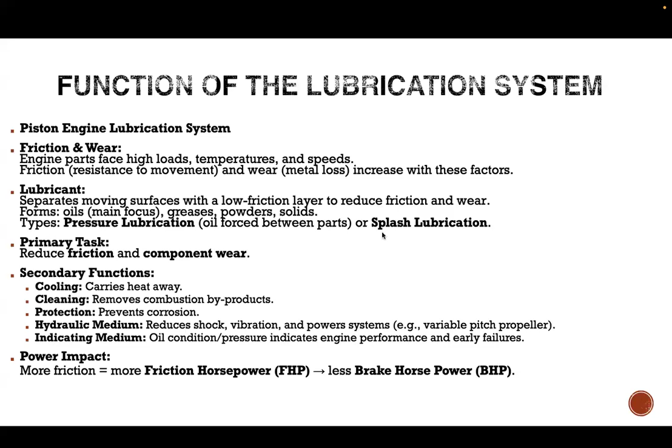So these are your primary functions of your lubricating system. Next we'll talk about your wet sump and dry sump system. Wet sump is basically your splash lubricating system, and dry sump is basically a pressure lubricating system. These are the only two systems available, and depending upon our exact requirement, we can either choose a wet sump system or a dry sump system.

The basic difference between your wet sump and dry sump system is where and how your oil is placed and how it is transferred to your engine. First we'll talk about your wet sump system. Like our Cessnas, we use a wet sump system where you store the engine oil right under the engine. You have an engine sump which holds all the engine oil, and by the movement of your crankshaft, it throws the oil around, which helps in lubricating.

But the problem with this type of lubricating method is that we tend to over-lubricate our engines - we cool it down and lubricate it way higher than what is actually required. This causes a problem: whenever we are maneuvering the aircraft, let's say banking to one side, the whole oil is going to go towards one piston. So one piston might get over-lubricated while the other piston might not get lubrication at all. These are the problems with having a wet sump system.

The other issue is about temperature. We cannot control the engine oil's temperature since it is stored right under the engine, and your engine is constantly running. So your engine oil temperature tends to be on a very high scale, causing the whole engine's temperature to always be very high, and it might get even higher if your engine is overworked.

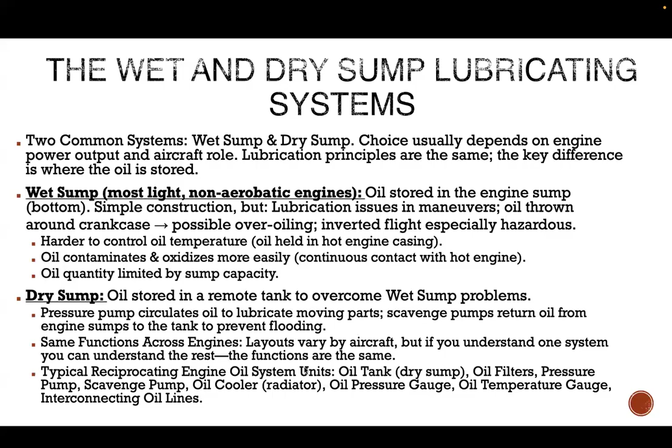First, you have it in your oil tank, which is also called a hot pot. You have a suitable scale to measure how much oil you have inside the tank. Then you'll have an oil temperature gauge inlet, which is going to measure the temperature right after the oil tank itself.

Then it goes to the suction filter, where it is filtered for any particles or debris, some dirt, whatever, which should not enter into our engines. Then you have your pressure pump. This pressure pump is a helical gear which spins against each other, which pressurizes your oil, and then it goes to a pressure filter.

This pressure filter is even more fine than your suction filter. So in your pressure filter, whatever further debris you have is taken away, so you don't have any debris at all. And at the end of your pressure pump, you're going to have an oil pressure gauge which measures the amount of pressure that goes into your engine.

And then it is sprayed into the engine core components. Once the job of lubricating is done, the engine will start dripping off the oil. It will go to the scavenging filter, because at this filter you're going to have carbon deposits. If your engine has more wear, there will be small metal pieces and all those things which can be collected, and then you can verify if everything is working properly or not.

Then that oil goes to a scavenging pump. Again, your scavenging pump is also the same helical gear, but it is going to be slightly bigger than whatever gear the pressure pump has. Your scavenge pump's gear is slightly bigger because we have to overcome gravity in pushing hot oil up into the tanks again.

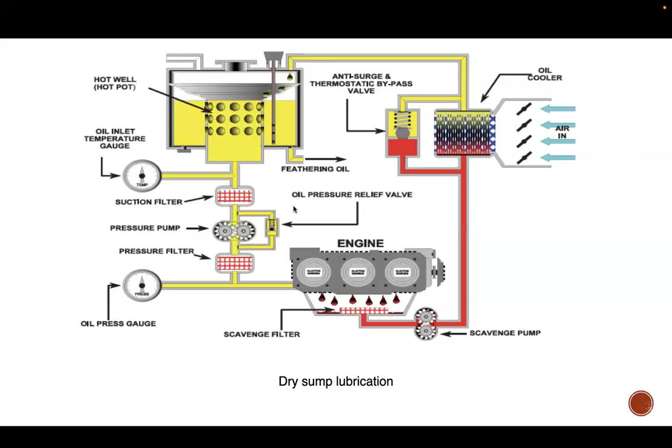This all works only whenever your oil is very cold and thick. If it's very thin, not as thick, or very hot, everything works normally, and it goes to the radiator where the air cools it. So this is the working of your dry sump system.

So we talked about the oil tank. It's made up of sheet metal, and you have internal baffles. These baffles break down the oil tank into many different sections, which limits the amount of force exerted on the walls inside the tank.

If you had one single large tank and your aircraft was maneuvering left and right, all the oil would hit one side or the other, causing problems due to the movement of the oil cushion. So when you baffle your tanks, it reduces the oil forces hitting the walls at each end. These baffles are also strengthened to overcome these forces.

Then your reservoirs are placed wherever possible above the engine. Why above the engine? In that case we can use the help of gravity along with the pressure pump to help feed the engine with high pressure, so the pump shouldn't have to do all the work of lubricating your engine.

The oil return starts whenever you start your engines, going to the oil drains. After shutdown, the scavenge pump will return oil that's at the oil sump itself, because your engine will still be dripping down oil.

Once you start your engine again, your scavenging pump is going to do the job, pushing all the oil back into the tank. So if you shut down your engine right after a flight, the oil that was lubricating your engine will still be dripping down into your scavenging tank and remain in the line, because it has to overcome gravity to be sent back up. This will only happen whenever you start your engine again.

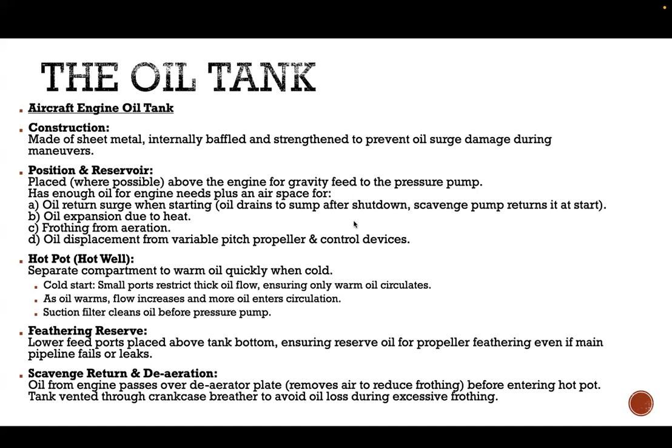So this is how your suction filter is going to work. Your suction filter is made up of different components, including the filter element. It's basically a very coarse wire mesh that is twined together in a rectangle or square box shape, which allows your oil to pass through it.

You're going to have a suction filter before the pump, where your oil passes through this suction filter and then goes into the pump. This removes any large solid particles in your oil, like carbon deposits, dirt, or metal pieces, and then your oil enters into the pressure pump.

Why do we do it? If large particles enter into your helical gear, there's a chance they can damage the helical gears, and your pump will lose its efficiency in supplying oil into your system. So to prevent this, you have a suction filter.

Whenever you change your engine oil during maintenance, whether it's at 100 hours or annually, they'll always replace this oil filter. If your oil filter is blocked or clogged because you didn't change it for a prolonged time, your oil pressure gauge will indicate very low oil pressure, meaning oil isn't going into your system properly. So you have to replace your suction filter.

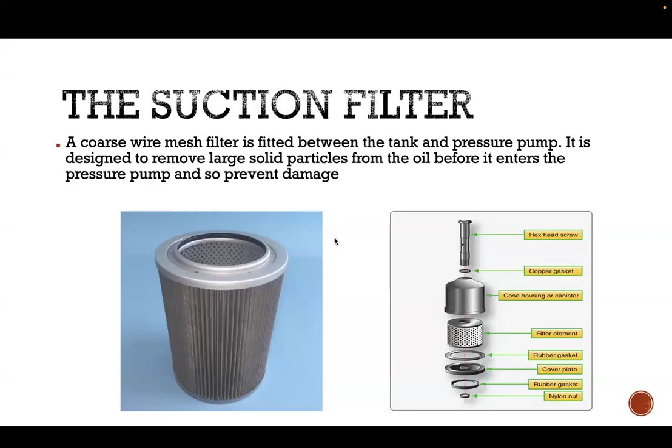Now, this is about your pressure pump. Your pressure pump is basically combined of two spur gears, which rotate in two different directions. This is basic engineering — when one gear rotates anti-clockwise, the other gear will definitely rotate clockwise.

If you want another gear to rotate anti-clockwise, you have to attach a third gear, then only it will start rotating anti-clockwise. For our case, we only want our oil to be sped up and sent through the system.

What your spur gear does is take oil from the inlet. Since the speed at which it spins uses centrifugal force to push it through the wall of the pump casing, this increases the pressure, and once the pressure increases, it goes through your oil outlet. So this is how your spur gear works.

Second, if your pressure is high, to relieve it we use a non-return valve, also called a pressure relief valve. In this case, your oil pressure can only go through one way and not through the opposite side. Your oil will go up through this way and not come back down.

How it works is, if your pressure increases, the ball is pushed up because of the excess pressure. When the ball is pushed up, the oil will again go into your inlet, and this whole cycle keeps continuing. Since the pressure is high coming from the outlet, it doesn't want it, so it goes up and then comes back down.

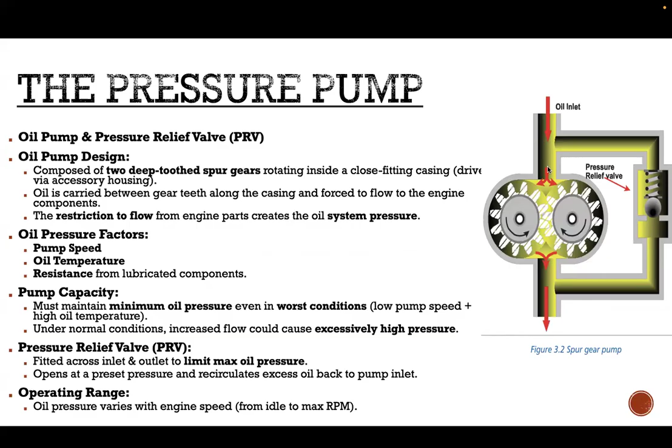The second type can also be an electrically operated shut-off valve. Depending upon how complex your aircraft is, you can either use a manual method like a lightly spring-loaded valve, or if it's a very big aircraft, you can use an electrically operated shut-off valve. The valve will open automatically whenever your engine starts, because as soon as the engine starts, you need some amount of lubrication to be done. So these are your check valves.

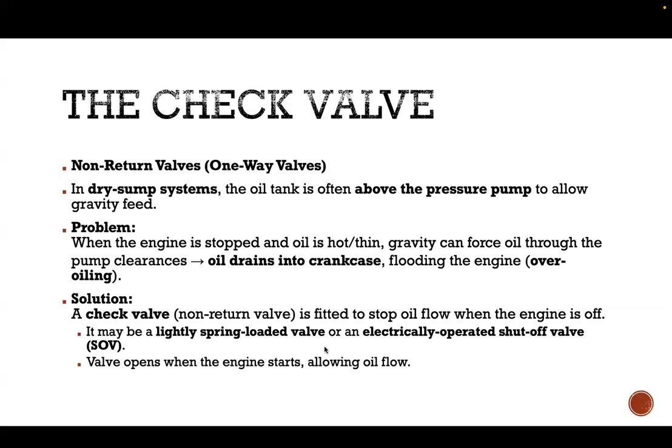Then you have your pressure filter. The pressure filter is kept after the pressure pump, so in the diagram, if you remember, it's kept on the down part. This helps filter out even minute solid particles, very very small, which pass through the pumps and other components before entering the engine.

Because our engine has to be as clean as possible, we don't need any debris and stuff which can become a hotspot as time passes by. Even a small stone that scratches your engine compartment will create a hotspot. There will be some amount of carbon deposits that get stuck, and during each combustion, those deposits get bigger and hotter, which can become a hotspot, and then you get detonation happening. So this removes your smaller particles.

Then you have your relief valve that we already talked about. That is your bypass valve, fitted in your pressure pump. This is going to be open whenever your oil is cold, so it doesn't allow oil to enter the oil pressure pump, and it directly bypasses into the engine. Whenever your oil is hot, this automatically gets closed. This also protects your engine even if you have engine failure or pressure pump failure, so that you always have a constant flow of oil into the engine with the help of gravity.

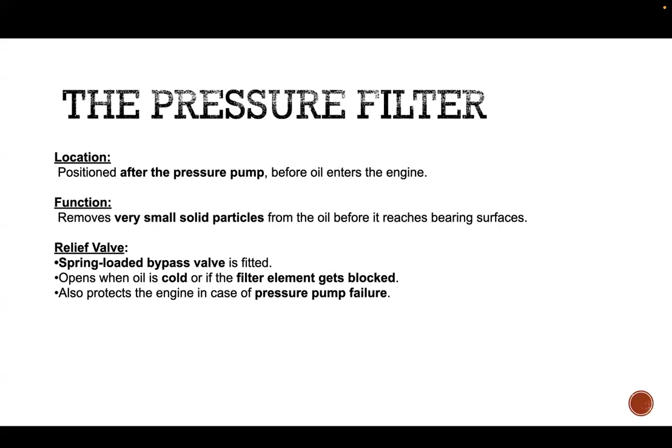Now we are going to talk about your scavenging pump. Your scavenging pump basically takes all the oil from the scavenging sump and sends it into the oil tank through your radiators. Whenever there is oil accumulated, the pump has to be slightly bigger because it has to overcome gravity to take all the oil back into the engine oil tank. That is the reason why you have a bigger size pump than your pressure pump.

So whenever the engine stops, the oil drains into the sump and stays there until next time your engine starts. This is the other reason why your scavenging pump is bigger - because whenever your engine starts, all the oil would have dripped down. So technically speaking, your oil tank doesn't have all the oil capacity.

So let's say our whole tank capacity was 6 quarts, and when you take out your dipstick you only see 5 quarts - we should not refill the oil, because one quart or half a quart of oil will still be left at the scavenging pump or scavenging sump. That adds up. If you add 1 more quart, assuming 1 quart was at your scavenging sump, the total oil capacity of your whole system now becomes 7 quarts, which will indicate a high pressure warning because we have more oil than necessary. So we should never add oil until it is really necessary.

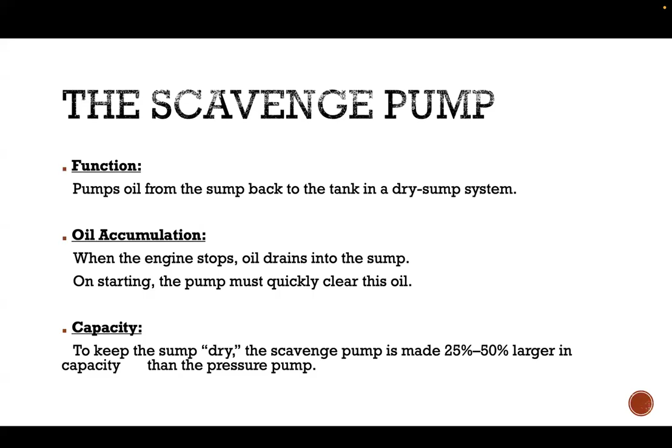Now, to keep your whole sump dry, the scavenging pump is made 25 to 50% larger than the capacity of your pressure pump. This is the reason it's made so big - because it has to drain all the oil as soon as your engine starts into the tank, so that more engine oil comes from the tank into the engine. There's no point in oil staying in the scavenging sump, because it's not going to lubricate on its own.

Next is we are going to have the oil cooler. The oil cooler removes heat from the engine - the oil removes heat from the engine, then goes through your scavenging pump into your oil cooler. If your oil cooler is working, what's going to happen is it uses inlet airflow into the engine, which is passed through tubes. As the air touches that pipe, it wears off some amount of heat, and you send it back. If you don't cool the oil, your engine will get hotter and hotter, and it is not going to lubricate properly.

Your lubricant will fail, because your lubricant only lubricates until a certain extent, and after your temperature exceeds whatever value it is then gonna fail as a lubricating agent, because your viscosity starts decreasing as you have higher and higher temperature values. So for this particular reason, we have to cool our oil.

Oil temperature is going to be influenced by the heat generated in the engine - the more power, the more heat you are going to have. Then there's the cooling effect of air, how hot or how cold your air is. If you are flying in Florida in summer, the outside air temperature is going to be very high, which causes us problems. On colder days, it is going to cool quickly. So both conditions could be accounted for.

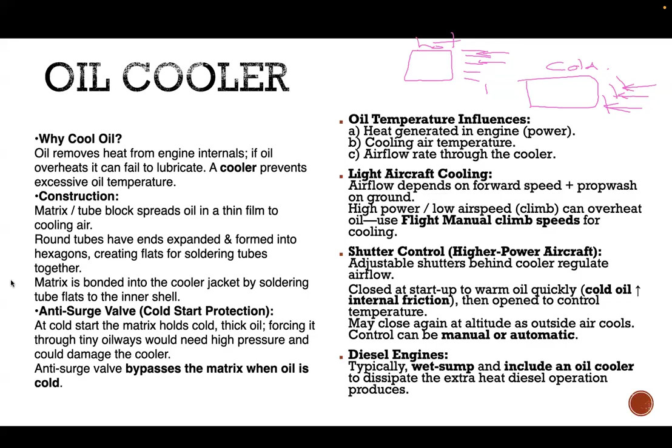Then we'll talk about your lubricating monitoring instrument. We have to monitor how your lubricating system works - is it working, is it in the green arc, and so on. So the parameters we are going to monitor are temperature, pressure, and the quantity of your lubricating liquid. Your temperature will be measured at the engine pump inlet - wherever you have your engine pressure pump inlet, that is where we are going to measure your temperature.

At the end of your pressure pump's filter, we measure the pressure of your engine. The typical value of your oil temperature is somewhere close to 85 to 90 degrees on average, and this is indicated via a sensor, or in case of a manual gauge, like what we had in our Cessnas, it's an electrical gauge converted into mechanical energy to give you your values.

Now, if you talk about your pressure sensor, the pressure is sensed at the outlet of an engine-driven pressure pump, at the very bottom of your whole flow chart. We sense the pressure after it crosses the pressure filter. This should range between 50 to 100 psi depending upon the size and load of your engine, and your sensors will be either electrical or manual type values.

So you either have an electrically activated pressure sensor, called a transducer, or a mechanically operated pressure sensor, which tells us the flow by spinning a bearing or something like that, indicating how fast your oil is flowing, which is accounted as pressure. Then you can have quantity.

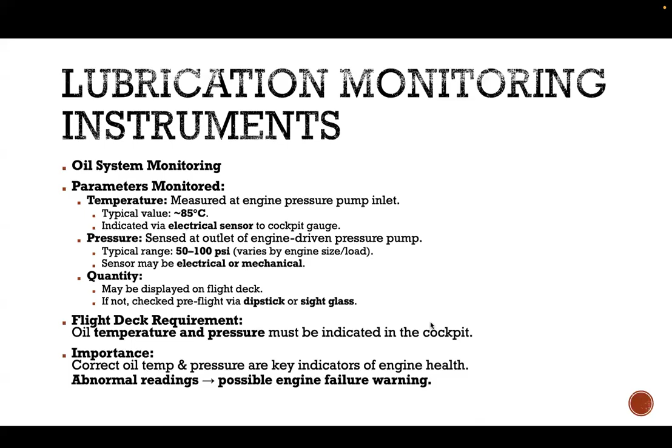Now talking about the viscosity of your engine oil - viscosity is basically how resistant it is to flow. Your oil viscosity should not be very high, where it struggles to move through your pipelines into the engine, lubricate, and come back. At the same time, it should not be very low either, where it flows just like water and fails to do the job of lubricating.

So you should have an engine oil viscosity adapted to all temperatures, because our aircraft flies at different altitudes with very extreme temperatures - at sea level maybe 35-40 degrees, and all the way up maybe -10, -5, or whatever, depending on how high our aircraft can go. For this property, we have to choose an oil which is not very low viscous or not very high viscous, something in between - that is your viscosity.

So thin oil has low viscosity, which flows freely. Thick oil has high viscosity, which flows slowly - it's not going to flow that much faster. Now regarding temperature, if we choose some kind of viscous oil in between, what happens is if your temperature starts increasing, your oil is going to melt and get thinner and thinner as your temperature keeps increasing.

The lower the temperature, the thicker the oil gets. This should be accounted for. It should not get thinner as fast as possible, but at the same time it should not get thicker too quickly either. You have to account for that.

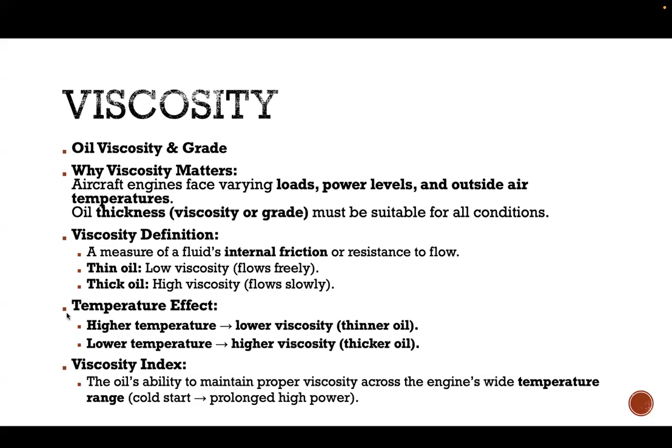Your viscosity index is the oil's ability to maintain proper viscosity across all operating temperatures. From the time you start your engine all the way till you land, your viscosity should remain at more or less the same rate. It will definitely start thinning at certain temperatures, but it will not thin as much as going from very thick engine oil to very thin like water. It can decrease slightly, but not to a greater extent that causes performance issues in your aircraft. So we have to make sure we have that type of viscous oil.

Your viscosity oil number is based on a standard. The first standard is called the Common Aviation Standard, SAE. This is what we see on our oil cans, it will say SAE and a number like 30 or 40. SAE stands for Society of Automotive Engineers. They have tested all sorts of oil, fuel, and everything corresponding to automotives. Anything that has an engine is an automotive, so airplanes also fall under that.

We also have a second system called Saybolt Universal, which uses numbers. For both systems, a lower number means a thinner, less viscous oil. Your SAE number will be half of whatever your Saybolt's number is. If your SAE number is 30, your Saybolt's number will be 60. If your SAE number is 40, your Saybolt's number will be 80. Some countries use SAE numbers, others use Saybolt's numbers. If you don't know which to use, just remember Saybolt's is twice your SAE number, so multiply your SAE number by 2 to get your Saybolt's number.

In the US we use SAE numbers, so we'll go by this. For a light engine, we use low viscous oil, which helps in operating at all temperatures and conditions. If you are using a very high powered engine, we have to use a thicker oil, because the high pressure and power generate a lot of heat. The higher the heat generated, the faster your oil is going to lose its viscosity. So if you use a 60 viscous oil, it will go back down to around 30 for this reason. But if you are using a 30 viscous oil, there are chances of it going below 30, even towards 0.

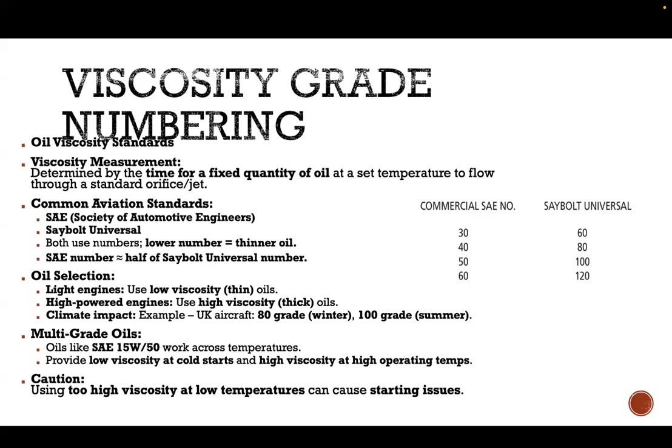So you don't have to go and find like 30 in summers and 60 in winters or vice versa. Now, if you use a very high viscosity oil at low temperatures, this can cause starting issues. So you have to be sure what type of oil you're using, and always refer to your manual to find out what oil should be used, what SAE number or Saybolt number should be used for your engine, so that it works without any problem. So this is your viscosity grade and numbering.

Next we have types of oil: mineral based oil, straight oil, compound oil. The difference between these three is mineral oil is basically made up of natural minerals, and that's what your piston engine uses. This mineral oil will be the cheapest of all, and it has no additives and all those things.

Straight oil has no additives. That is, we are not going to add any sort of deaeration agents, or anything that can cause increase or decrease in viscosity. It's going to go by its viscosity number, which can be either an SAE number or a Saybolt number.

Second one is compound oil. That is, we are going to add something to it, like antioxidants, detergents, and an oiliness agent. Antioxidant helps your oil not oxidize, which helps in maintaining the oil's life for an extra period of time.

Detergent is used in your oil to not let froth happen, so that it doesn't froth as fast. That is, it's a deaeration agent.

And your oiliness agent - whenever we use oil, it's always slimy and slips and all those things. If you use an oiliness agent, it does the job of oiling and lubricating, but at the same time it's not going to stick to the surface. It doesn't become greasy, where if you keep your hands in it, it's going to get stuck to each other.

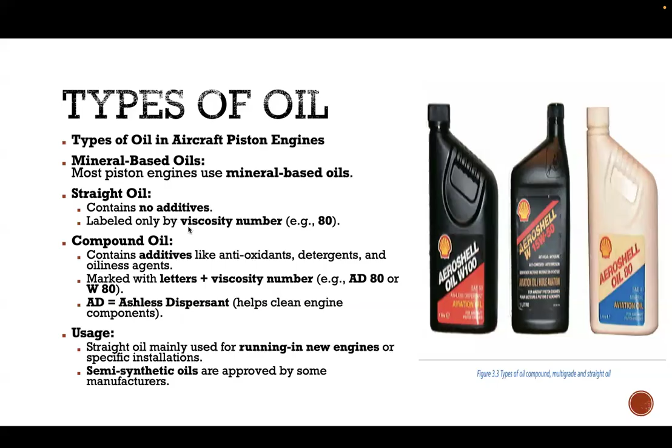You also have semi-synthetic oils that are approved by some manufacturers. Semi-synthetic oil is going to be between straight oil and compound oil. You don't have all the additives that should be there, but at the same time you don't have no additives at all - it's something in between, where it still helps with the job of lubricating. So these are your types of oil.

Then you have your operational considerations, that is, your indications - monitoring and all those things should be done. Why should we do it? So we can check whether your engine is working properly, or if there's any problem with your engine that can come up in the future. Your oil indications give us advanced information about what is going to happen to your whole engine well before itself.

Now, whenever you're starting and you warm up, you have to always make sure that your oil pressure is positive and within the specified limits. We should always make sure that our oil temperatures and such are in the green arc.

Whenever you start your engines in a cold start, there is always going to be a high pressure system, because the oil inside your whole oil system is going to be of a little higher viscosity. So your engine has to warm up first, and then only you can move your aircraft, so that we don't damage our aircraft's pressure pump.

Now your temperature and pressure are dependent. That is, if you have a high oil temperature, that means you have a low pressure inside your oil system. If it is a low pressure, it can be of many reasons - you might not have enough oil inside your system, or you have an oil leak or something. So if you see a low pressure warning indication, that means you're gonna see a high oil temperature warning indication. Both of them are interdependent on each other.

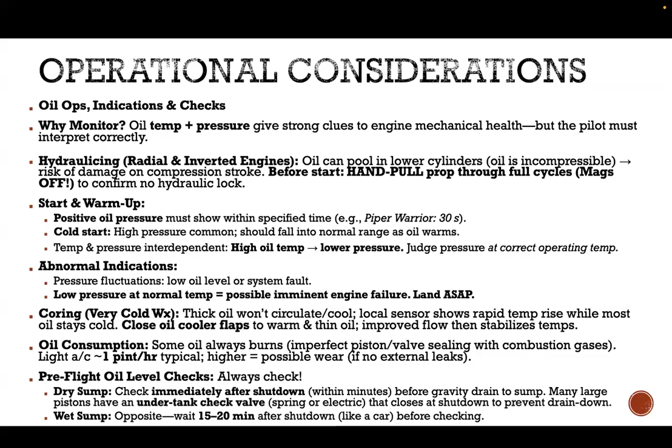If you use a wet sump system, you have to wait 15 to 20 minutes after shutdown, because all the oil has to drip into your wet sump. The second reason is the whole engine is going to be hot. So if you try to open something that is very hot, the pressure inside, if not escaped, can also blow back into our faces. So we have to pay attention that we don't open our engine oil cap when it's very hot. You have to be sure about it.

So I guess we are done. This is the end of your lubricating chapter.